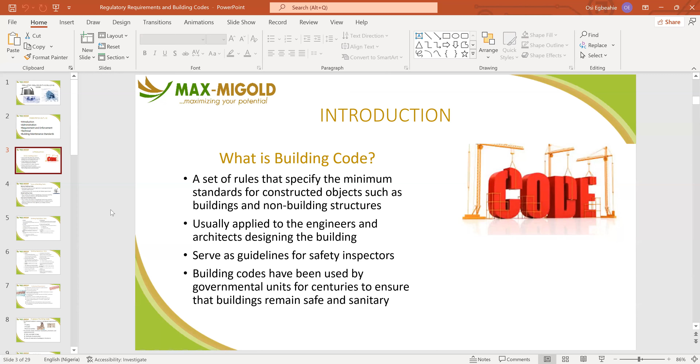The inspectors normally will not take a code from another region and try to apply it in a particular region, especially when the region has its own code. For any building or structure to be safe or deemed safe, it must comply with its local building code. It must comply with its local rules and standards and regulation that are the minimum standard where that structure or building is localized. Types of building code.

We have national code. National code is developed by government agency or standard organizations, depending on what they name it to be. And they are enforced across the country by the federal government. Example of that is the SON that we have.

SON is the Standards Organisation of Nigeria, which gives a number for any product or any building material or any item that comes into Nigeria as the minimum required standard to meet for the use in Nigeria. And Nigeria itself has a building code, which was adopted in 2006.

I know presently it's being revised and a lot of work has gone into it. I'm not sure that code has been signed into law yet, so it's the revised one, so that it becomes very useful and everybody will have to comply to it when it is signed into law. However, Nigeria has a building code.

Model building code - this is where the power of regulating construction and fire safety is vested in local or subnational authorities. National building code refers to a nation or a country's code or standards that they have set aside.

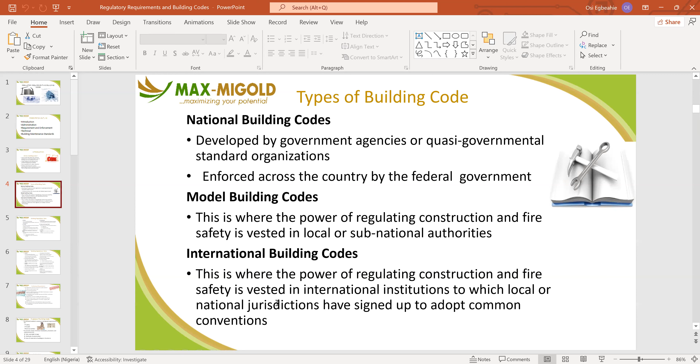You have a structure. For a structure, the building code will look at the structural stability of the building, and areas covered including the design of foundation, walls, floors, and roof components. We talked about this when we were discussing our building fabric - the foundations, walls, floors, and roof components.

Now, for a structure, one of the things the code addresses is the structural stability of the structure. The building code takes care of ensuring that the building is standing. Every element of weathering that would affect that building - the building will still be standing for a given number of years. Normally, for any building that is properly built, it's expected that it should be able to stand for a period of 50 years without requiring any major work in terms of the structural elements.

The building is expected to remain the way it is for 50 years before any form of major renovation, restrengthening, or stability work will probably be done. Buildings are actually expected to go more than that. I know there are buildings existing and standing that are over 100 years old. Those buildings are still standing and okay because they used these codes, and the minimum required standard was used in building them.

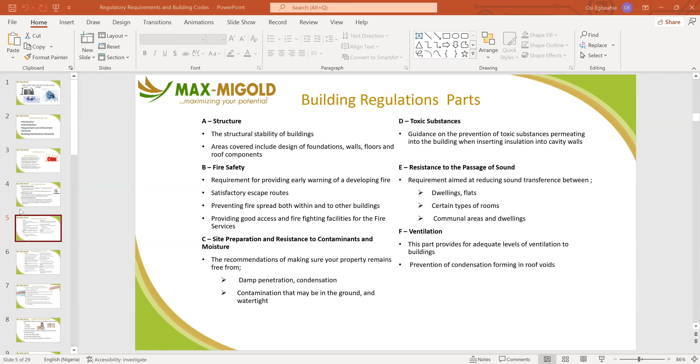Hygiene. Concerns with providing sanitary conveniences and adequate washing facilities, includes requirements associated with unvented hot water storage installations.

Generally, hygiene, we know that you require that level of hygiene whether in your day-to-day life or where you work. You should have minimum standards for hygiene.

For healthcare facilities, they require a high level of hygiene for them to be able to take care of the people, especially for hospitals. The place must be hygienic so that people that come for treatment don't go back becoming more sick.

Drainage and waste disposal. We must ensure that buildings have adequate drainage to be able to drain storm water and then manage waste that the building is generating, whether organic waste or non-organic waste.

It's very important that facilities have that. Imagine building a house without a septic tank or sewage system - where will all the waste go to? It's very important for us to plan and work with that.

That's part of the reason, part of the things the code makes provision for. By minimum standard, you must make provision for waste disposal and also drainage to be able to drain the facility from stormwater, because it must rain. And even if there's drought, it will come to an end and it will rain.

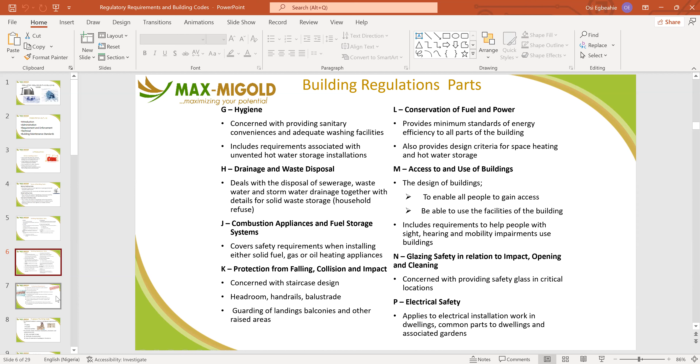Electrical safety covers appliances and electrical installation work in dwellings, common parts of dwellings, and associated gardens. You must ensure that all electrical installations are properly protected so that you don't have electric shocks going around. It's standard to ensure that these things happen.

Professional requirements: the requirements to becoming an inspector or plan examiner. Normally, there are inspectors who visit buildings from time to time. In Nigeria, this happens mostly during construction. For Lagos, it's domesticated with LASBCA, the agency that monitors building control to ensure buildings meet minimum required standards. LASBCA visits sites to check for compliance, check reinforcement, and check the concrete used to ensure it meets the designed minimum standard, ensuring you're not cutting corners with structural elements.

They check your piping level, building setbacks, and generally the ventilation and layout of the building to ensure you have enough ventilation for areas with windows and thereabouts. Now, for these inspectors, there are minimum requirements for becoming an inspector and examiner.

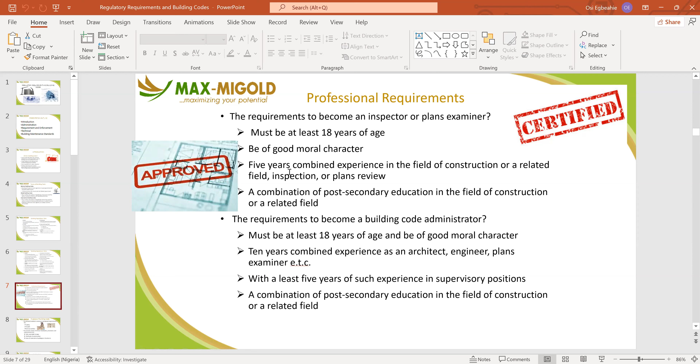With at least 5 years in such experience in a supervisory position, a combination of post-secondary school education in the field of construction or a related field is required.

Purpose of building code: to provide suitable minimum standard requirements for, one, the safety of those that will be using the building, and two, the health of those that will be using the building, and general welfare. General welfare is very important. You have safety, you have health, you have general welfare to ensure that the building does not collapse on people.

The purpose of the code is also to ensure that those staying in the building are able to live in it without being afraid. It also provides certain minimum standards, provisions, and requirements for safety and stability of design.

The standard doesn't just take care of the building when it's being erected. It also takes care of the building as it's being designed, so that if there are any issues, they are resolved from the design stage. Corrections are made from the design stage, which makes it a lot easier to manage than waiting for the building to be constructed and then coming to do the corrections.

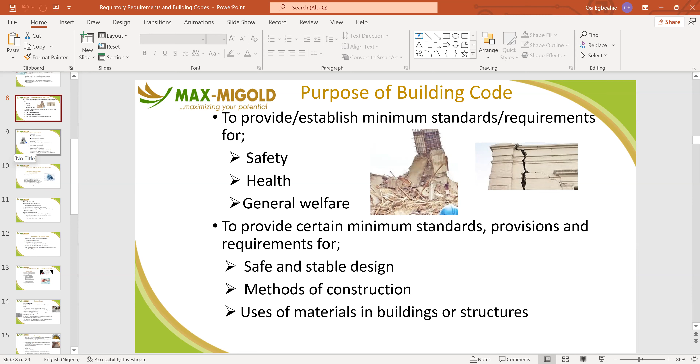Scope of building codes: standards for structural placement and sizes. The structural elements of the building, their placement, and also their sizes.

If you are using reinforcement, the reinforcement is very important. Where you are supposed to use 20mm, if you use 14mm, no matter how you try to use it to carry the load, it will struggle to carry that load. That's why the regulators will always ensure that the right materials are used for the right places.

Also usage, wall assemblies, ingress, roofs, foundations, and roof structures. These are all the areas that the inspectors will check and ensure, and the code covers these areas to ensure that every part of the building is actually covered.

The rules regarding parking and traffic impact. The code also covers parking, how you park. For an architect, they know the minimum requirement for a car park, the size of a normal car, the size of the car park, what kind of provisions you need to provide, and how movement should be within a parking lot - the traffic management plan. The architect should know that and know how to manage it.

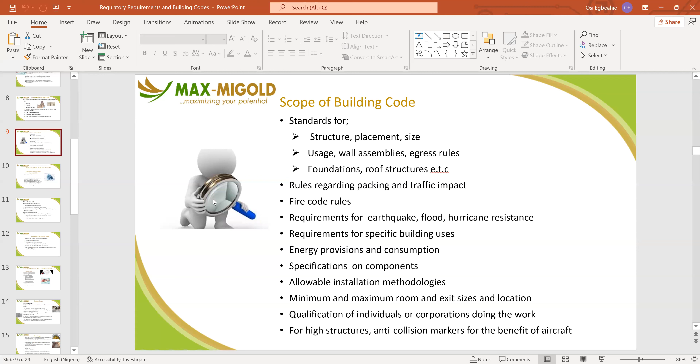Building Code Administration. National Building Code of Nigeria, 2006.

The National Building Code in Nigeria came into enforcement in 2006, like I said earlier on. The National Council of Housing and Urban Development deemed it necessary to initiate the process of evolving the National Building Code with a view to profile a lasting solution to accelerate trends in the building construction industry. That's the reason why the building code was enacted into law.

The aim of the building code is to set minimum standards on building pre-design and design, construction and post-construction stages, with a view to ensuring quality, safety, and proficiency in the building industry. It also encourages professionals in the building industry to produce the most appropriate code suited to our environment, for subsequent use and application.

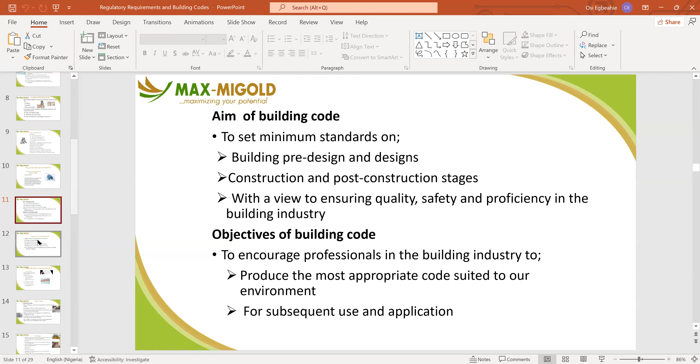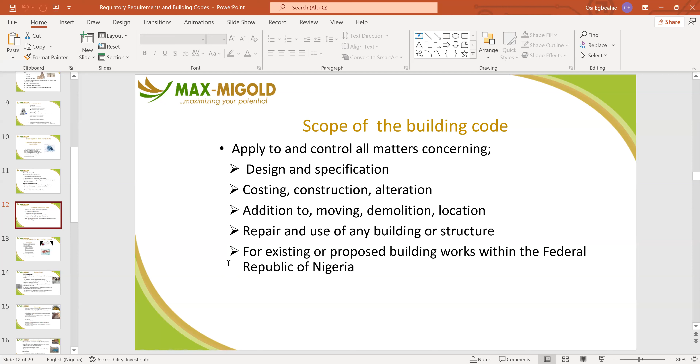Scope of the National Building Code: it applies to and controls all matters concerning design and specification, costing, construction, alteration, addition, moving, demolition and location, repair and use of any building or structure for existing or proposed building works within the Federal Republic of Nigeria. These are the scope of the National Building Code as it relates to Nigeria.

Requirements and enforcement. Pre-design stage: the phase of analysis that occurs after some form of funding is available and before the design begins.

During the pre-design phase, studies are done to analyze space requirement issues, the constraints and the opportunities of the proposed site, and the cost versus the budget. During this stage, you are supposed to study and analyze what is required for the space you are planning to do, the constraints and opportunities of the proposed site. You also look at cost versus budget to ensure you have enough funds to fund the building.

The pre-design phase may include site analysis, programming, construction cost analysis, and value engineering.

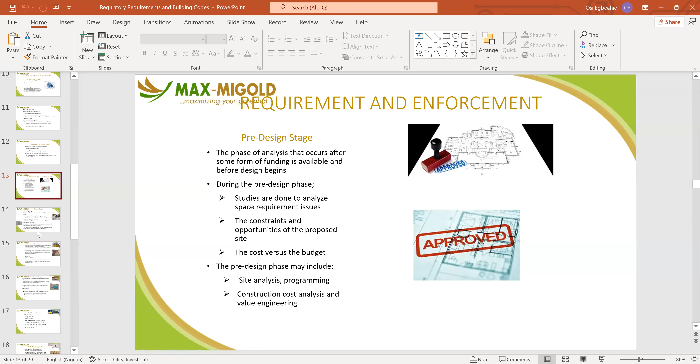During the preliminary stage, major emphasis is placed upon the civil, mechanical, and architectural design, because that's where you have most of the work that needs to be done. The design of all the mechanical processes is handled, the architectural concepts, if required, are developed, and structural systems identified.

All the required site investigations are made before the completion of this stage. This means all the site investigations, including the soil test and the acidity of the soil, are done to ensure the water drainage works and everything functions the way it's supposed to. Required site investigations would normally be done before building commences.

A sufficient number of drawings are then completed to communicate the design concept - that's production of working drawings. The working drawings form a full interpretation of the intention of the designer of the structure, to ensure the structure is interpreted just like the designer has designed it.

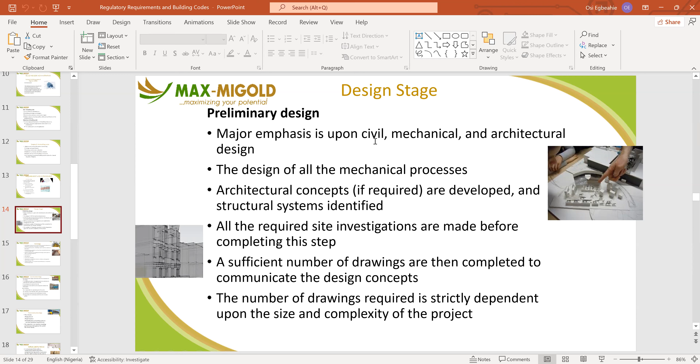The number of drawings required is strictly dependent upon the size and complexity of the project. If you are building a stadium, for example, the drawings required are far different from building a 2-bedroom or 1-bedroom bungalow. The one for a 1-bedroom bungalow may just be one sheet, while a stadium may require tons and tons of drawings that will not be finished in a short time. It's very important that all those drawings are made available as required.

Final design: the final detailed architectural, structural and engineering drawing, which is the blueprint of all physical components of the project, is provided. In some complex projects, a final design report is written in addition to the drawings submitted as the blueprint. Virtually all design problems must have been resolved by the end of the final stage.

Sufficient details must be provided by the drawings and report to allow reasonable estimates of the cost of construction, cost of operation, and construction scheduling. All revisions to construction materials, machinery, or equipment specifications are made. Updated schedule, cost estimate, and specifications are contained in the final design report.

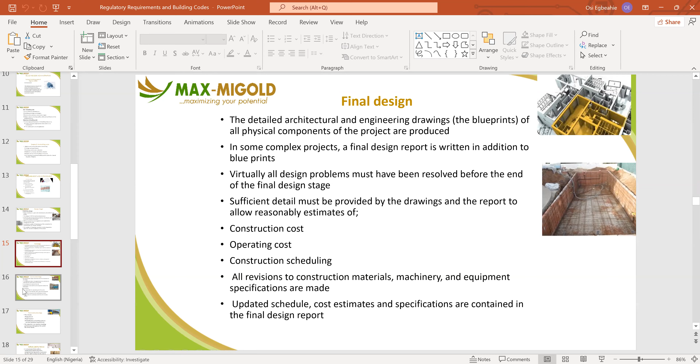Construction stage: the construction stage commences after the finalization of design, after all working drawings have been produced. In a traditional model, a contractor is appointed to undertake the construction of the facility. It encompasses all the works on site. Construction covers all the work requirements needed to deliver the project as it has been designed.

The contractor is responsible for undertaking all the works, providing all the materials, labor, plant, and equipment. Sometimes the client may decide to provide materials while the contractor provides the labor, plant, and equipment.

Controls the sequence and coordination of work. That's the contractor, responsible for coordinating with the works of other parties.

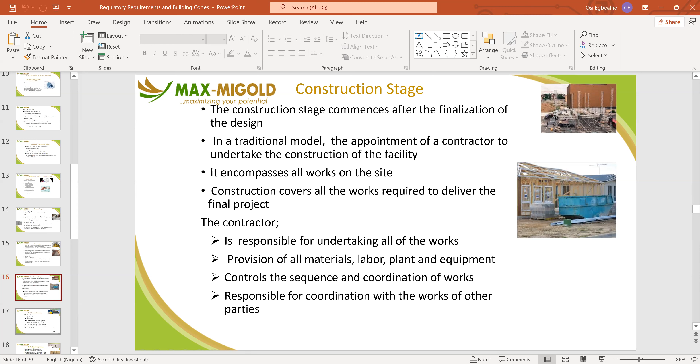Post-construction stage includes adjustment, optimization where necessary, and modification of the building system to meet specific requirements. Where the building needs some adjustment to be made, it will be made in the building. The objective is to maintain building performance throughout the useful life of the facility.

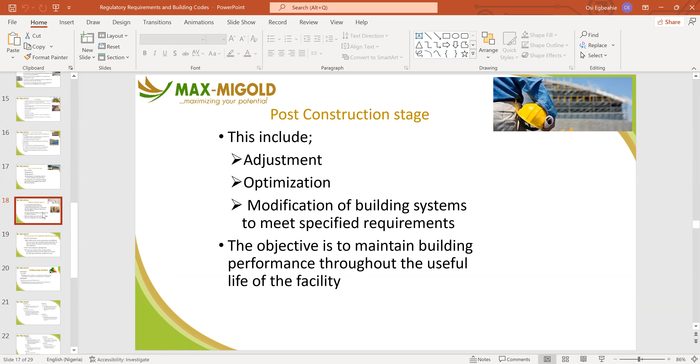Defect liability period - I've talked about it. It's a set period of time after a construction project has been completed, during which the contractor has the right to return to site to remedy defective issues that have arisen on site. A typical defect liability period lasts for 6 to 12 months. Defect liability period will only arise if it is included in the contract, which I expect should be included.

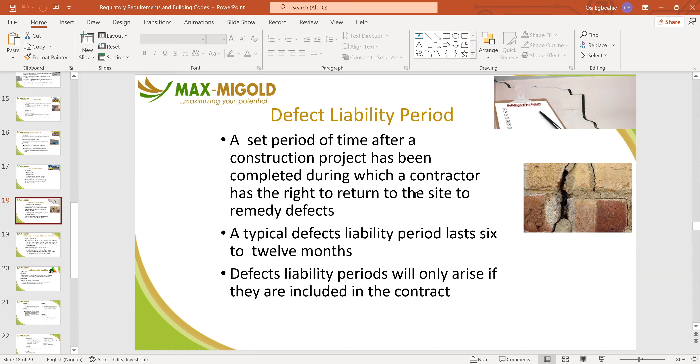Purpose for defect liability period: for the contractor, it is likely to be more economical and efficient for it to be carried out - for the contractor to carry out remedial works itself than to pay the cost for another contractor to be hired to do it. From the employer's perspective, he doesn't need to hire an alternative contractor to carry out the work, or carry out the work himself and reclaim the cost.

Building design classification - let's stop here and take a break. When we return, we'll go into the building design classification.

The slides are for building classification - that's just different. We'll go into the different building classifications after the break. We'll take a 10 minute break now, and then when we return, we'll continue. I hope that's fine with everybody.

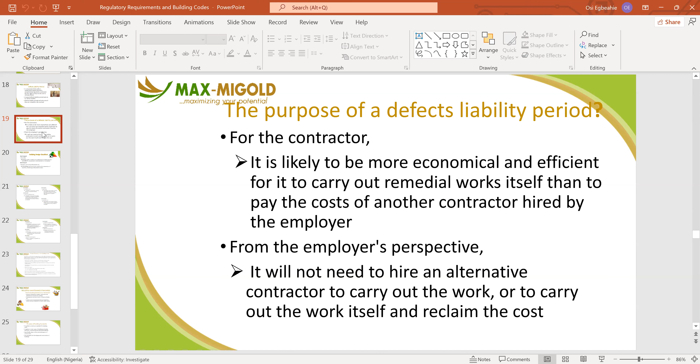Yes, please. Okay then. Yes, sir. Okay, great. Yes, sir. Okay, sir. Yes, we can. All right, thank you.

We'll just continue from building design classification. Buildings are classified based on their uses.

Use A, assembly building: buildings with or without an auditorium in which persons assemble for amusement, entertainment, or recreation.

Classification B, business building and professional uses: all buildings and structures used for the transaction of business and rendering professional services.

C, educational buildings: all buildings and structures used for business or vocational training.

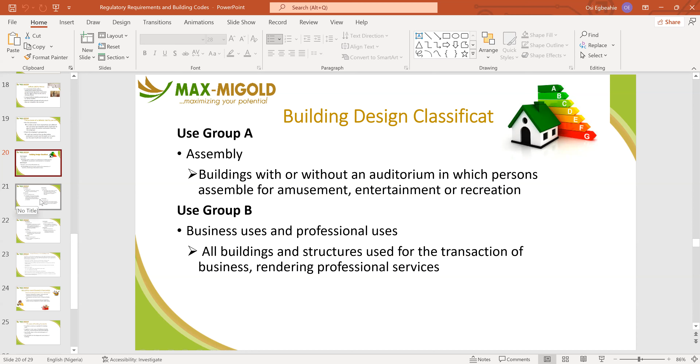C, this is talking about schools, higher institutions, or thereabout.

D talks about factories where you produce stuff.

E talks about hazardous chemicals, where you produce hazardous chemicals and inflammable materials, just like refineries or thereabout, fertilizer production plants and all that. It's separated from factories because it has a little bit of hazard to it, so special care is normally taken for that. G is for merchandise.

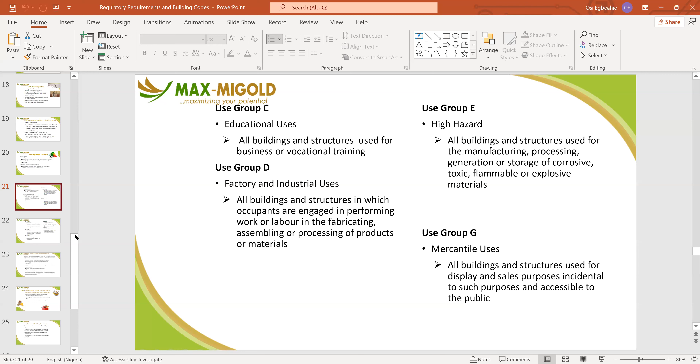This is for markets, shopping malls, or thereabout, shop arcades and all that. H, residential building, we know that.

I, storage, warehousing. J, mixed use structure, where probably you have multi-level buildings combining residential and offices, residential and shopping arcade, residential and school or church or thereabouts. That's what you have in mixed use.

K, when the use is not specified, when the building is just constructed and after a while there's no specific use - they can use it for anything, maybe just an open hall, a space that can be used for anything.

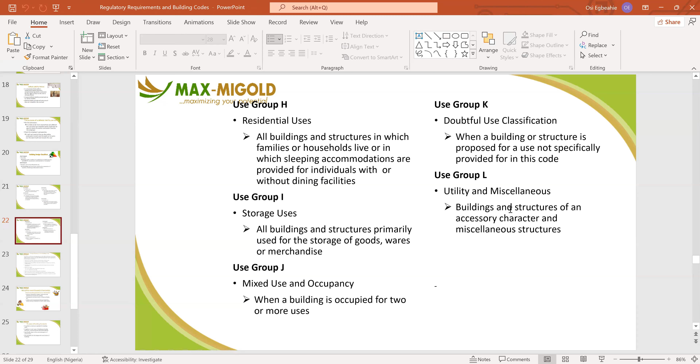Miscellaneous, utility or miscellaneous building: these are normally buildings found in very large factories where you just build a shelter that can be used for anything, probably for assembly. They can use it sometimes as a makeshift area for doing some work, or maybe a construction yard where they just store their materials and use it as the need arises.

Energy efficiency in building. According to IEA statistics for energy balance, 2004, 2005, 2007 edition, the total energy use globally accounts for 7,209 Mtoe, that's megatons oil equivalent.

The residential and commercial sections account respectively for 1,951 and 638. That means residential takes more, while the commercial sector takes less, which is almost 40% of the final energy used in the world. That is, the energy consumed in the world is majorly from residential and commercial buildings, while the rest is spread across other sectors.

So if you want to improve energy efficiency, the targeted areas are the commercial sector and the residential sector. Even within commercial and residential, residential takes more because that's where people stay more and use more gadgets. Work happens in the morning to evening then closes, while in residential buildings, some things will be on throughout the life of the building. Your refrigerator will probably always be on. Your washing machine, your pumping machine will always be on, and so on.

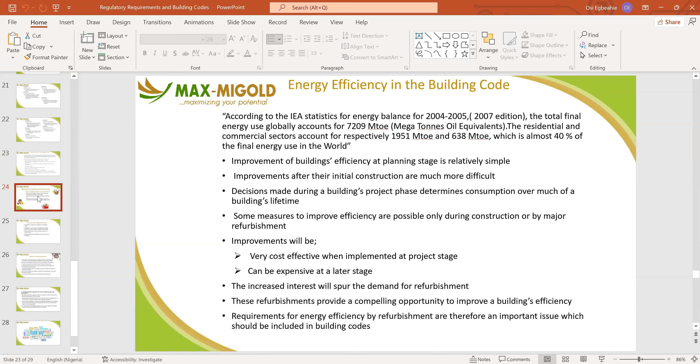For building maintenance standard, what is it? It's the minimum standard for design, construction, and alteration applicable to virtually every building, developed by the government and professional bodies, containing a list of requirements designed to ensure a minimum standard of health, safety, and welfare. Like in Lagos State now,

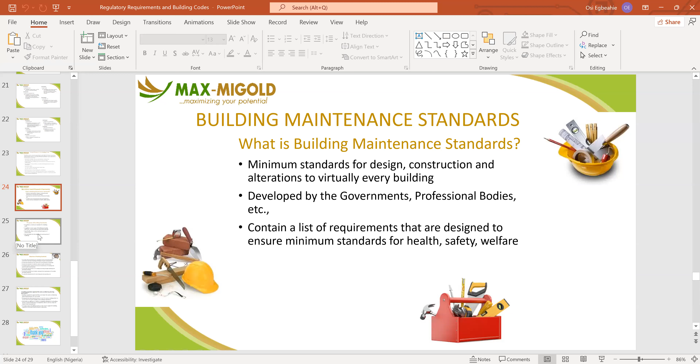to undergo renovation in your building or to maintain your building, you must do a non-destructive test. It is very important; if not, they will not grant you a permit. If you start doing any work without that, they will come and seal up the site to say you're not working safe. So it's important to note that if you are doing any renovation in your house, you go and seek a permit from Lagos State. They will come do a non-destructive test to ensure the building is still in good condition, so that you don't come and demolish it afterwards.

The purpose of the building maintenance standard is to achieve a minimum standard for the building work. It applies to most types of buildings, including domestic, commercial, and industrial buildings, especially related to technical aspects of construction.

Set standards for the design and construction of the building. When remodeling buildings, sometimes you require a specialized way to work, especially when breaking off walls. There are steps you need to take so that you don't eventually cause the building to collapse, and sometimes you need to reinforce structural elements like the beams and columns.

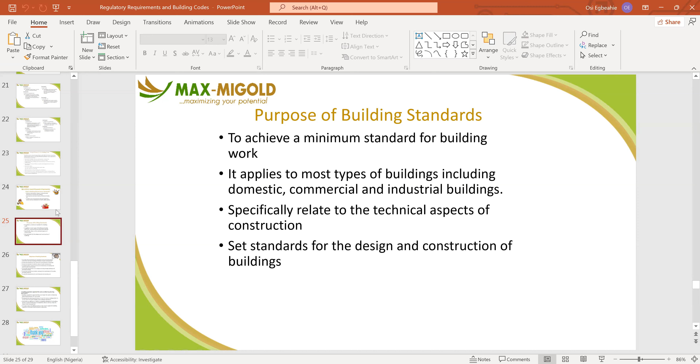Where you have issues with the foundation, it's an opportunity for you to also work on it. So it's very important that you note that when doing any form of refurbishment, you must take that into consideration.

The objective of building standards is to remake with amendments the regulations which control the design, construction, and use of buildings and places of public entertainment, to prescribe standards for construction and demolition, for safety in places of public entertainment, to regulate matters relating to use and maintenance of buildings, to prescribe requirements for design and siting of single dwellings and associated buildings, standards for fire safety, and requirements for swimming pool and spa safety.

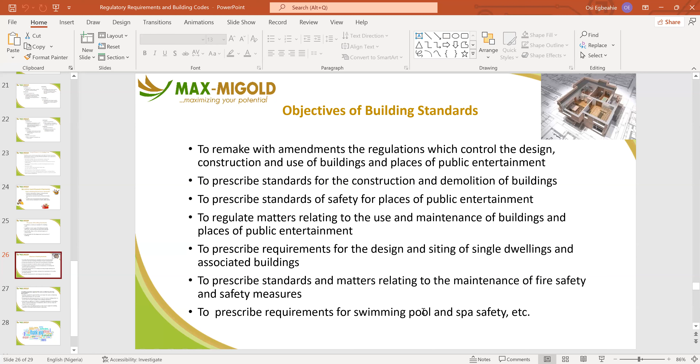So I don't have people drowning in swimming pools.

Is building regulation approval the same as obtaining a planning permit? The answer is generally no, they are not the same thing. Building regulation approval does not mean the same as obtaining planning permits for your work. Planning permits look at the designs and drawings and see that they meet the required standard, then you get approval. Then when you are constructing, that's when you have the building regulation approval.

It is after the construction has been done. Being granted a planning permit is not the same as taking action to ensure the work complies with building regulations. Generally, you will have to adhere to building regulations for building works or internal alteration of properties, and for such you may not require planning approval. For many types of building work, you may need to apply for building regulation and planning permits separately.

This is just to generally educate us. When it has to do with building, planning approval is totally different from building regulation. In Lagos, the Lagos State Physical Planning Permit Authority will give you planning approval, while for building regulation approval you get that from LASBCA, and you only get it after the building has been constructed. They will then give you a certificate of fitness stating that the building has passed the required checks and is certified okay for people to live and inhabit.

Any other question? Please, let's ask our questions. Okay, Clement, I can see your hand, please your question please. Good evening, sir, good evening everyone. Thank you for today's lecture. Please, I want to know. Please go ahead.

In which one can follow if you have maybe a structure to develop in Lagos State, what are the processes?

Okay, I'd actually run through this before, but I'll do it again. If you have a structure to develop in Lagos, if you have a piece of land, first of all, you need to get a qualified architect to do the design for you. Once your design is done, you will then be required to take that architectural design to the planning authorities.

They are normally situated in the state planning office, and each local government has its district offices. Immediately you go to the local government, you see them there, you submit the drawings, they will look at it and vet it. Once they have vetted it, they will give it back to you with their comments and corrections that you need to do, if there are any.